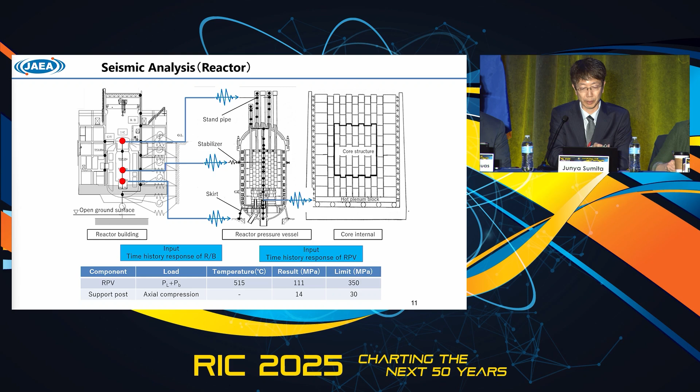Next, I'm going to talk about conformity to new regulatory requirements. After the Fukushima Daiichi nuclear power station accident, revised regulatory requirements were issued by the NRA in Japan, and JAEA submitted an application, including evaluation results satisfying the new regulatory requirements, to the NRA. Through many discussions with NRA, JAEA obtained permission, and HTTR restarted its operation on July 30, 2021. This table gives the result of the safety review by the Nuclear Regulation Authority.

The safety system structures and components were classified from S class to B class based on the results of safety demonstration tests. For example, the core heat removal system, originally classified as S class, is now being discussed for change to B class. Also, reactor internal structures, originally classified as S class, are discussed for change to B class. The regulatory review results show no large-scale reinforcement is needed due to downgrade of SSCs, so additional countermeasures are not required for earthquakes. JAEA has extensive experience in safety licensing and has the data needed for HTGR safety licensing.

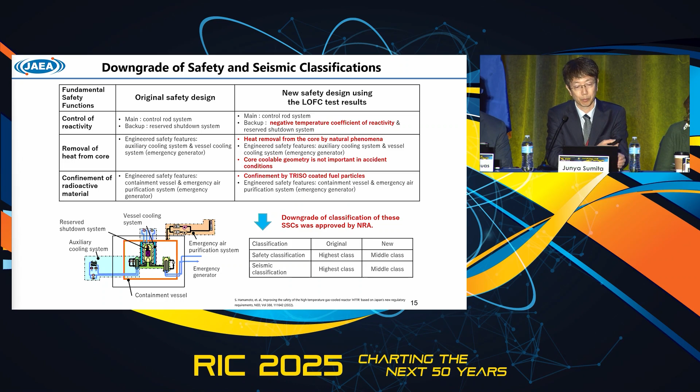In order to realize HTGR commercialization, there are some challenges and approaches. For policy challenges, we need project predictability, and for society, we need to select the site and develop the business scheme. For technology, we need to develop reactor technologies such as reactor core components, which need to be scaled up, and also fuel and codes and standards. We also need to develop heat application technologies such as coupling systems and hydrogen production systems.

Throughout these challenges, approaches will be solved through HTGR demonstration reactor development and HTTR heat application testing.

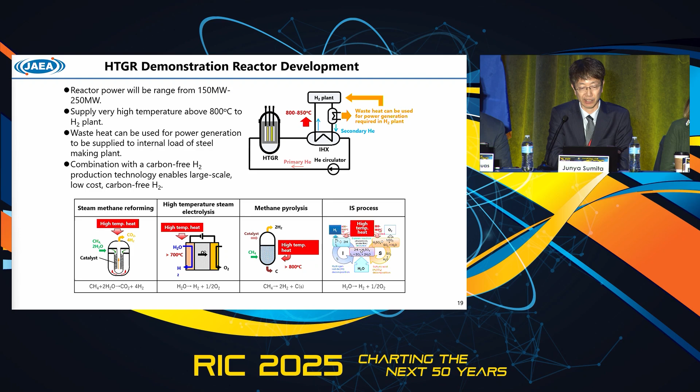Finally, I'd like to show our HTTR heat application test. The hydrogen plant will be located next to the HTTR building to establish the design for coupling of HTGR and the hydrogen plant, and to demonstrate the performance of components required for this coupling, for example high temperature isolation valves, hot gas duct, and so on, using the HTTR.

This table shows the schedule of the HTTR heat application test. We are about to apply for licensing to NRA by the end of this month. Design of HTTR modification and design of the hydrogen plant have been carried out, followed by modification of HTTR and manufacturing and installation of the system into HTTR, in order to produce hydrogen in 2028.

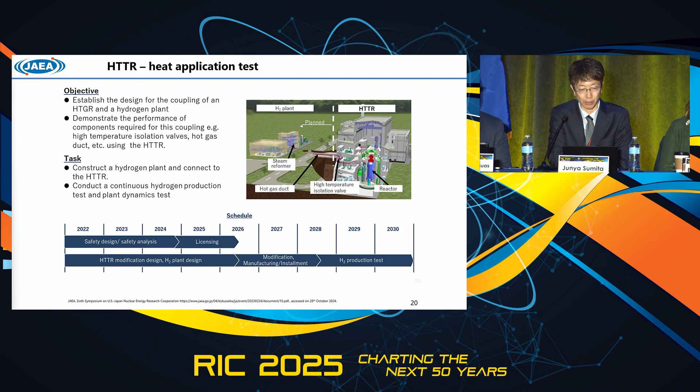This is a summary of my presentation, but I'll skip this slide. Thank you very much.

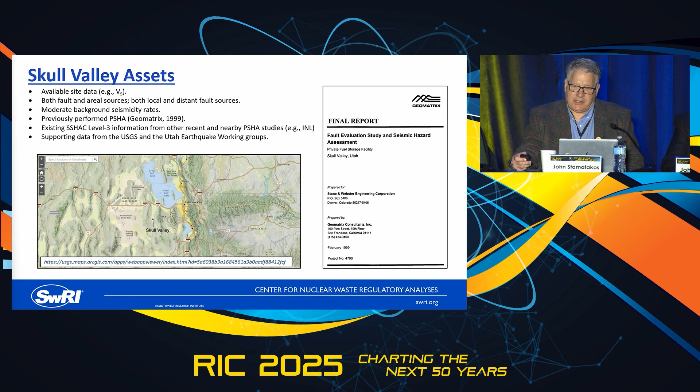There's a report out there that justifies in much more detail why we thought that site was appropriate for this demonstration project. I'm showing you the cover page of the Geomatrix report published in 1999 that supported a lot of that evaluation. But it wasn't just their data we used - we used a lot of USGS information, and I'll talk about that as well.

Out of that, we produced two documents. These will be two research information letters that will hopefully be published quite soon. One of them is the SSHAC study itself, providing a format and content guide for future SSHAC Level 1 studies - I think it's a pretty complete document, and I'm actually quite proud of the team and what we were able to produce there. We also produced a companion recommendations report with a lot of interesting information about things we discovered along the way and some advances that I think will really help the process in the future.

The technical team - I was the lead of the SSHAC, but I worked with Cliff Munson and Tom Weaver at NRC, Kristen Ulmer at Southwest Research, Ryan Payne here at NRC, Adrian Rodriguez-Marek, who's a professor at Virginia Tech. Our participatory peer review panel was John Ake and Gabe Toro. So that was the background of that study.

I won't talk about the results in great detail, but I just felt obligated to have a slide that had results. So you see the seismic hazard curves on the left and the uniform hazard response spectrum and the GMRS in the center, and then the tornado plot, which shows what we now know at almost all SSHAC studies - that the thing that really controls the uncertainty in seismic hazard analysis is site response and the site term. That's the most important, and I think going forward, being able to reduce that uncertainty will have the greatest benefit in reducing overall uncertainty in all of these seismic hazard studies.

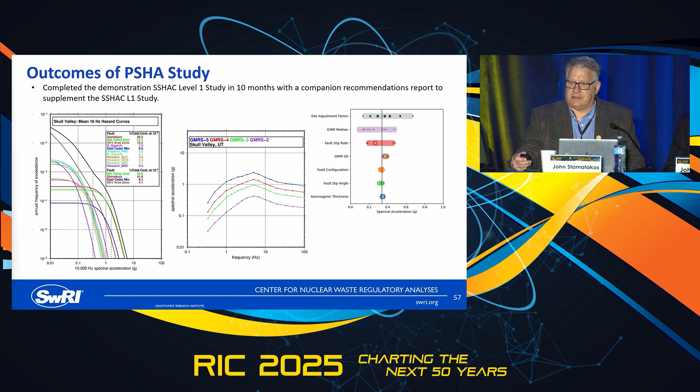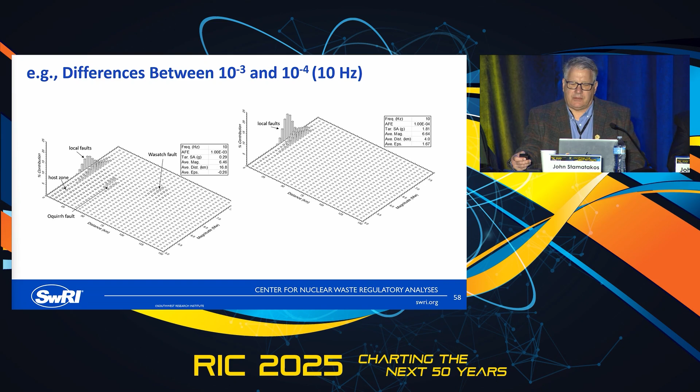One of the things we discovered in this analysis with using USGS data is that the USGS has this huge mission, and it's impossible for them, I think, to keep up with all of the information that's out there and available. We discovered that depending on which sources we were looking at, there were differences in their interpretations of fault lengths and fault rate activities. Their quaternary database has different interpretations of fault activities than are used in their latest seismic hazard model. Their latest seismic hazard model uses a lot of GPS data for their rates, which is not something that's been done in many other studies. So there are very important differences in how those are applied, because USGS has a different mission than trying to really understand and characterize the seismic hazard at your site.

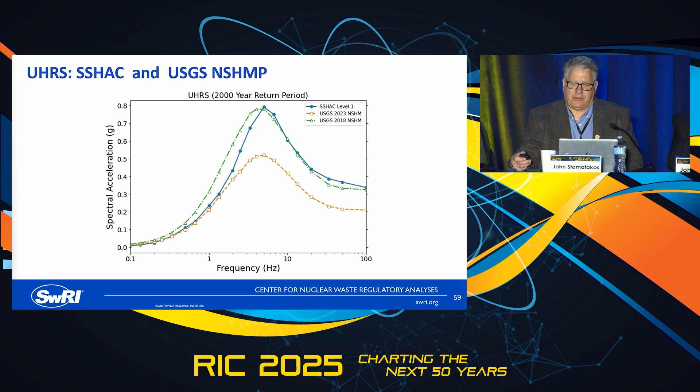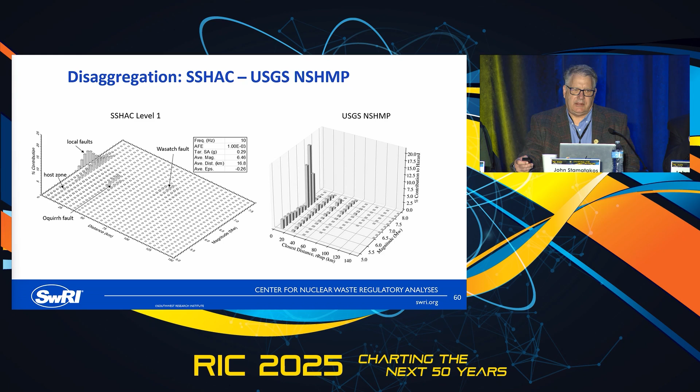Here's the comparison of the deaggregation for our SSHAC study and the USGS. Because of the way the USGS has quantified their fault sources, the contributions of those faults to their hazard compared to what we had from our study are different. It's important to recognize that there are simplifications, especially in the USGS hazard model, that they need to make because of their mission, that you would miss if you hadn't dug in and understood the details of the geology and seismology at your site.

A couple of other interesting and positive outcomes of the work we did: we developed a new generic ground motion model for the Western United States. The left figure compares that model with ground motion models developed for other recent SSHAC studies, like INL and Hanford. The uncertainty is a little larger in our model, but it can be applied across the Western United States, and that's documented in the report.

The other thing we did, because we embedded our hazard analysts with our team throughout the process, is find ways to simplify logic trees in ways that don't affect the outcome. On the right, we show a comparison of a portion of a logic tree for a fault source, looking at the full logic tree with 18 or 20,000 runs through the hazard curve, versus a trimmed one. We can recapture all of the fractiles with our trimmed logic tree as with the full one, saving a lot of computation and analysis time.

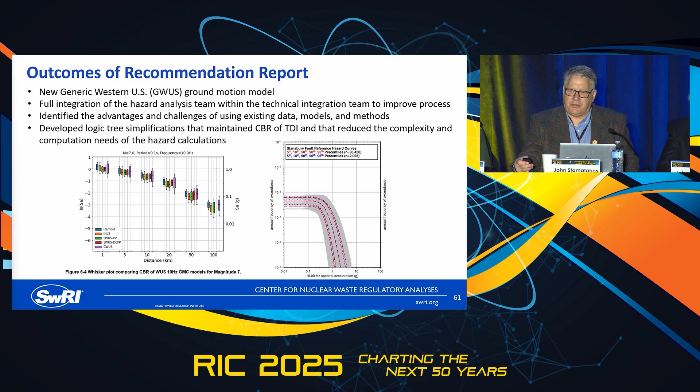So in summary, I quickly discussed some of the work we're doing on enhanced risk-informed, performance-based design methodologies. Documentation of that should be out soon for everybody to review and provide feedback on. The demonstration SSHAC project was completed, and we think we did that within a reasonable schedule and cost commensurate with the risk profile of these advanced reactors. Personally, not speaking for the NRC, I do agree that at some point even that is too much.

For really low risk facilities, there should probably be other alternatives. But the approach we used here meets all the requirements of 1.208 and the requirements in 10 CFR Part 100.23. In producing that SSHAC study, we showed the benefits of doing a dedicated, site-specific analysis to make sure you capture everything important and contributing to the seismic hazard at your site.

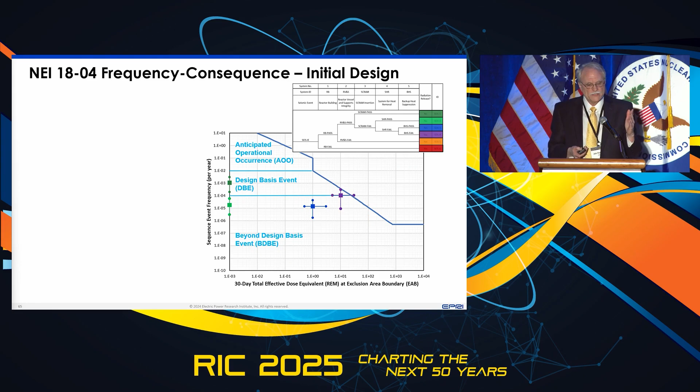And so every one of the endpoints in this event end up on this diagram. The top two are the green ones, and they show up all the way on the left axis because those are success paths, so there's no release. The rest of them all go in different places as you work your way down, okay?

There's a few hard spots on this diagram, and the red line shown down here is a release boundary constraint out of one of the laws. And so it's showing that one of these endpoints has a 95th percentile possibility of exceeding that. So that's an unacceptable endpoint. A few of the others are close to or above the diagonal line. Those would be undesired - you're above your goals.

So in a risk-informed design, what would happen is you would go in and adjust your design. This is an iterative kind of process that happens in parallel, where you're studying your normal design characteristics and then your risk results out of that design, and they both kind of iterate together, which is a new way of thinking about how we do risk analysis.

For the operating fleet, the designs were already done, and then we did a risk analysis of the existing plant. In this process, one of the challenges is that you would need to iterate on the design and on the risk at the same time. So the design people need to understand a little bit about what the risk guys are analyzing and how it's influencing the results, and vice versa. The risk people need to understand what options the design people have in making some changes. So anyway, you can iterate through this process. For example,

One of the interesting aspects we're doing some work on now is that within the primary civil design standards, they already have a graded design process, a graded implementation process. This was put in place a long time ago, and that applies both for ASCE 7, which is a non-nuclear standard, and ASCE 43, which is the nuclear standard. And if the key result you need out of your structural design is to achieve a certain performance goal, that's achievable in either of these standards.

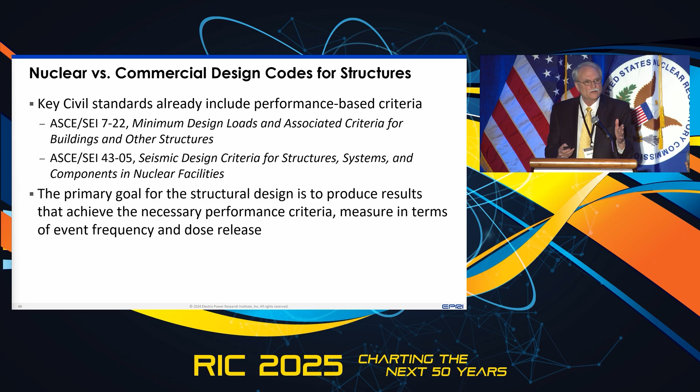So this is my last slide, and I just want to make the point. We did a very admittedly simplified look at the graded process available both in ASCE 43, which is the orange bars on the left, and ASCE 7, which are the blue bars on the right. You can achieve different performance goals within the parameters of those standards. So if that is the key result you care about, it seems you could likely achieve that even with just using commercial standards.

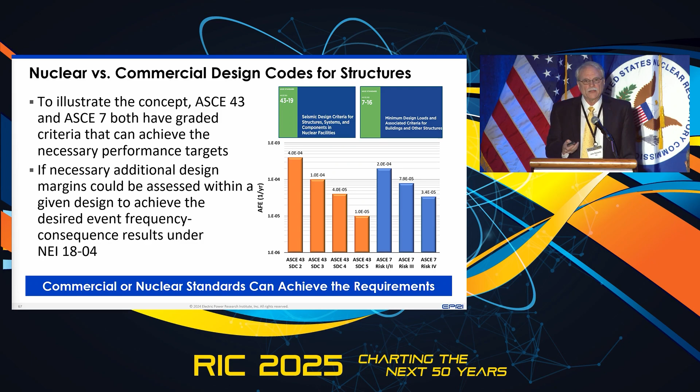Now, there's some devil in the details here, and we have not completed this research, but that's a path we're pursuing, and we hope to complete at least a good part of that research and publish some of those results later this year. All right, so that's a different view of risk-informed design.

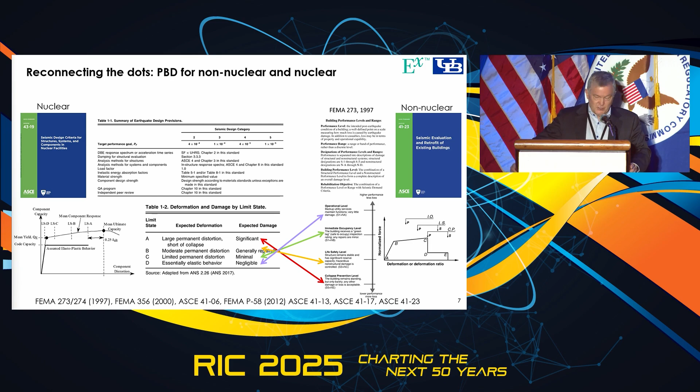So it's not surprising, because the same folks that were involved in the writing of ASCE 43 in the early days, including Robert Kennedy and Alan Cornell, were involved in the writing of the standards that started with FEMA 273 in the mid-1990s. So we can map nuclear to non-nuclear and non-nuclear to nuclear very, very easily.

So as I look at high-performance structures and materials, there's a lot of information on this slide, but I just wanted to make one important point here with respect to concrete. The material itself is not that important. There are processes and procedures we have in our building code, ACI 318, that ensure the concrete strength or material strength is always going to be greater than the minimum specified.

The real issue with structures is detailing. If I'm looking at a reinforced concrete structure, a key to success or a key to quality, key to performance is the detailing and the on-site construction inspection, which is standard fare in non-nuclear construction.

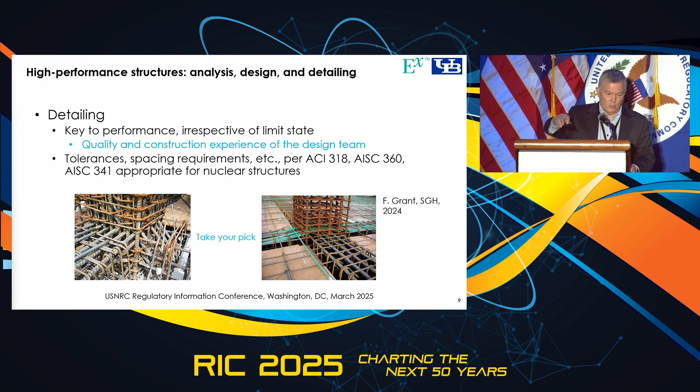And that's absolutely critical in delivering nuclear structures. So peer review is an important facet of non-nuclear structures, or the design and construction of non-nuclear structures.

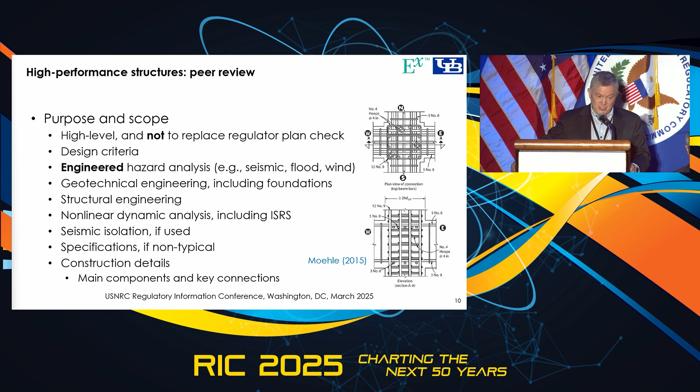You cannot compartmentalize a process. You can't have the hazard folks developing a product and handing it off to the geotechnical engineers, then handing it off to the structural engineers. It has to be an integrated process, and this is standard fare in non-nuclear space.

So as I look at high-performance structures, my perspective on what we need - a question to ask is, how good is good enough? And this is probably the only presentation at the RIC that will involve Ferraris and Porsches. But the point here is that we deliver high-performance structures each and every day via ASCE 7, and we can do the same with ASCE 43.

Why should we be paying attention to non-nuclear US civil standards? It is my opinion that they are more than sufficient for US nuclear facilities, and to the point John Richards made a little earlier, we have tens of thousands of examples every year of these standards being deployed. Peer review is critical for high-performance civil structures. Innovation in non-nuclear sectors often happens decades before innovation in nuclear space because there are many, many more applications.

Performance-based design has been routine since the 1990s. We're just starting to talk about it in nuclear space now. And getting back to the question of non-nuclear US civil standards, are they good enough? My answer is yes. Is there any evidence of poorly performing code-compliant buildings?